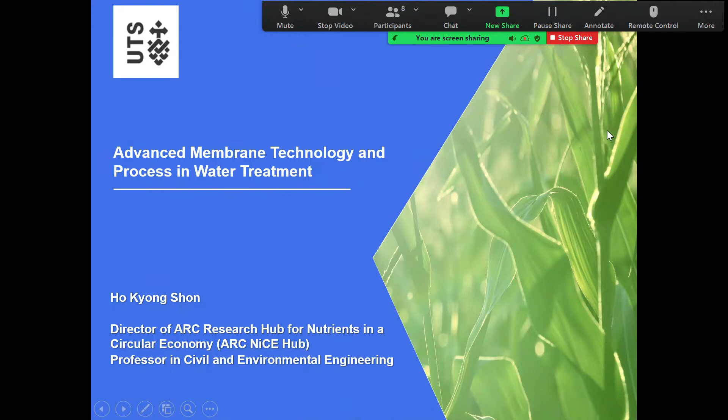Yes, thank you, Professor Song. You can. It's okay, right? Can you see Yes, the? okay. Yeah. Yeah. So this is the today content.

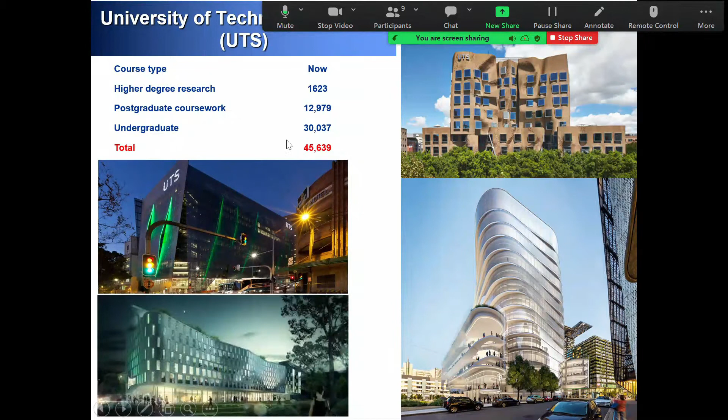This is the library, and this is the business building. We have almost 45,000 students working together.

Our main activity is how we can make sure our nutrient circular economy system works. Currently we live in a linear economy: the production, use, and discharge of nutrients.

For nitrogen fixation, we rely on the Haber-Bosch process, which accounts for 2% of global greenhouse emissions. For phosphorus, we rely on phosphorus mining, but this will run out in 100 years, so we need to look at alternatives.

Based on these nutrients, we produce food using nitrogen and phosphorus, then consume it and discharge the nutrients into waterways as contaminants. We need to remove as much as possible to reduce nitrogen and phosphorus. Also, in wastewater treatment plants we produce CO2 and N2O, which are the main greenhouse gases, so we need to reduce these emissions from wastewater treatment.

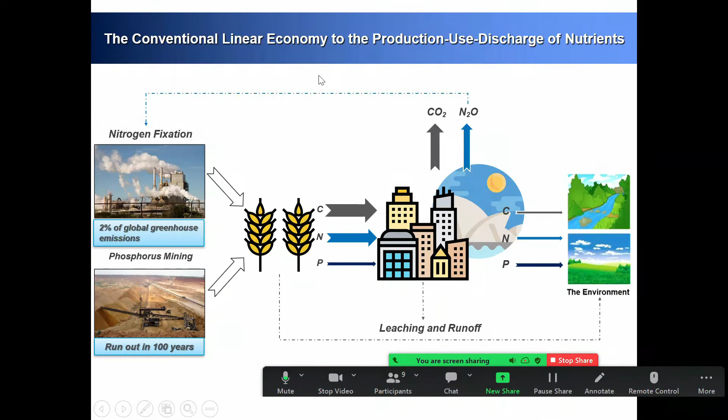So how can we turn a linear economy into a circular economy? We want to collect nutrients like nitrogen and phosphorus before they are discharged to waterways, and use them to produce fertilizer and food, which we can then consume. This is the nitrogen and phosphorus resource efficiency we can achieve using a circular economy system.

In Australia, which is one of the agricultural areas, we utilize a lot of nitrogen, phosphorus, and potassium, and 25% is exported to China, Korea, Japan, and other East Asian countries. We also rely on domestically produced food.

That's how we look at the nutrient balance. If we recover nutrients from humans, for example from urine, we can observe almost 10% of nutrients, allowing us to create a circular economy system.

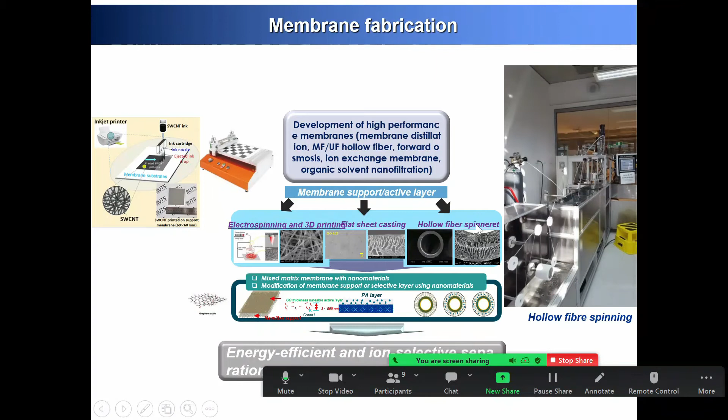We are also developing membranes in our laboratory: membrane distillation, microfiltration, ultrafiltration, osmosis, ion exchange membranes, and organic solvent nanofiltration. We utilize electrospinning, 3D printing, flat sheet, and hollow fiber methods to produce these membranes.

We are also looking at solar powered capacitive deionization. This is Tuvalu, shaped like a boomerang, with 25 square kilometers of area. Its population is only 10,000, and there is no fresh water, so they rely on rainwater 100%.

During severe drought, water availability becomes a major climate change issue. Climate change has increased sea levels, creating more problems, and even the groundwater collected from the rainwater system is getting worse due to climate change.

So we're looking at how we can provide solar powered CDI desalination at a small scale. That's what we are also developing.

Seawater contains lithium, which is one of the important battery elements. We have 230 billion tons of lithium in the ocean, so if we can collect it effectively from seawater, we can cover our next generation of battery materials. We're researching how to collect lithium and separate it from other elements.

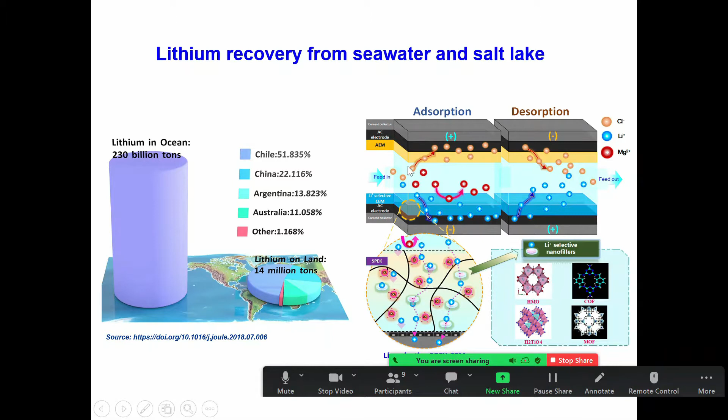Such as chloride or magnesium. You can see the lithium can be adsorbed on the CDI electrodes after passing through the cationic exchange membrane. Lithium compounds can selectively pass through this membrane, and we utilize new materials to enhance the selectivity of lithium from seawater while developing this technology. Our student is working in this area.

We are also developing a membrane for organic solvent nanofiltration, called OSN. Australia aims for a slice of the 61 billion dollar hemp industry for medical and food products. This is hemp, also called cannabis, which contains cannabidiol.

This is the non-psychoactive material, and it also contains tetrahydrocannabinol. Psychoactive extraction can be achieved using organic solvent nanofiltration. These are the CBD and THC compounds. When you have the cannabis plant, we can...

Put this solvent into the cannabis extracted material to dissolve the CBD and THC, which are important psychoactive materials. Then we utilize a solvent-tolerant membrane, using an inkjet printing method to make a better membrane for organic solvent nanofiltration. That's what we're working on in this area.

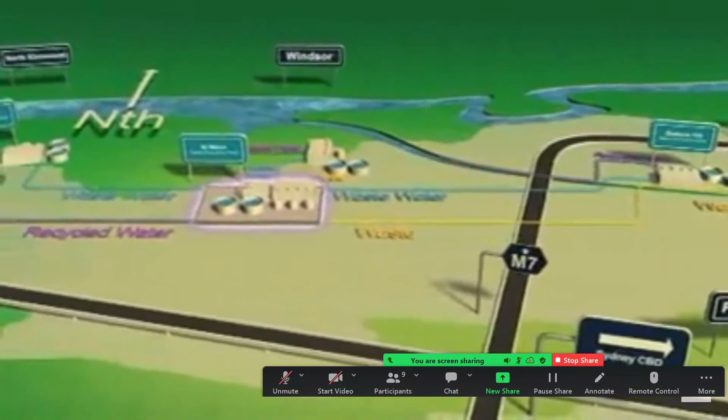produces up to 50 million litres a day of very high quality recycled water. The water is then pumped to Penrith and released into the Hawkesbury River below Penrith Weir. The St Mary's Water Recycling Plant is a key part of the New South Wales Government's Metropolitan Water Plan. It will play a critical role in increasing water recycling in the Sydney region to 70 billion litres a year by 2015.

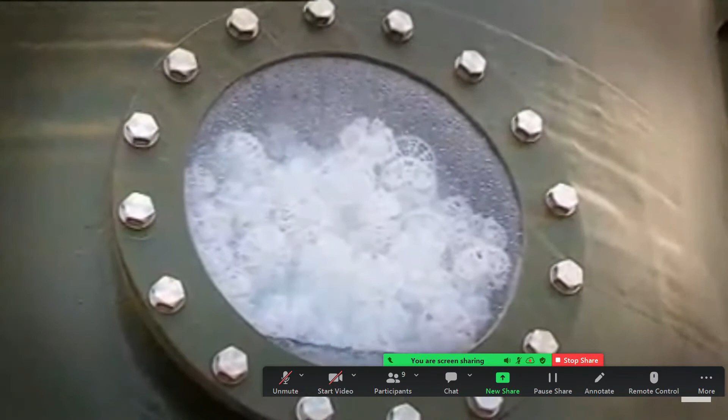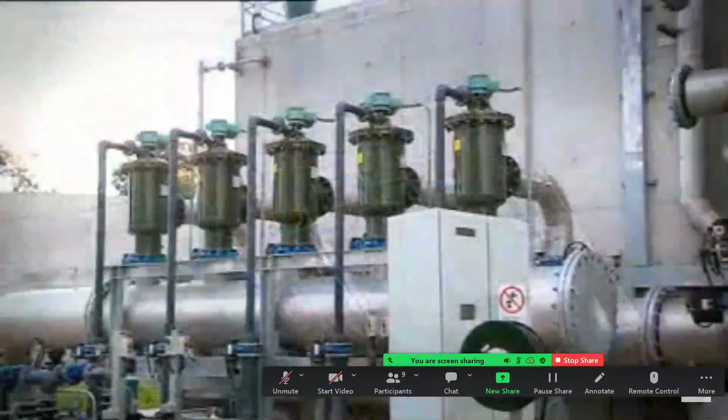At St Mary's Water Recycling Plant, the highly treated wastewater from the St Mary's, Quakers Hill and Penrith plants is delivered into the feed water balance tank. From here, the water is then moved through three filtration processes for further treatment. In the first part of the process, the wastewater passes through a very fine mechanical strainer. This pre-treatment process removes any particles of organic matter that may still be present.

Ultrafiltration is the next stage in the process. The recycled water is pumped into a tank containing the ultrafiltration membranes. A vacuum is applied to draw the recycled water through the semi-permeable membranes. The pores are only 0.02 micron in size, a micron being a millionth of a metre, and allow clean water to pass through, while suspended solids, bacteria and some viruses are blocked.

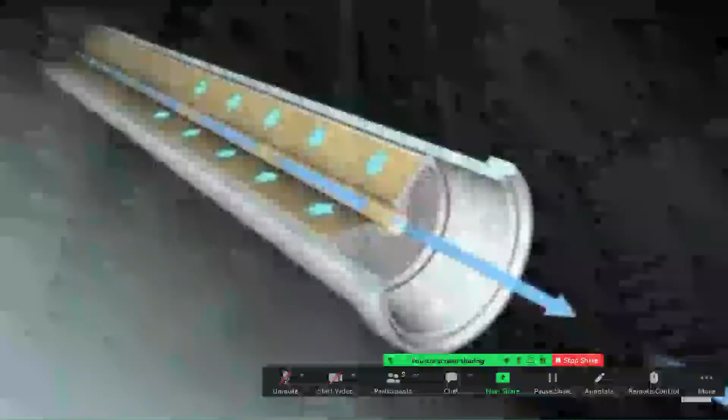From here, the treated water is then pumped to the reverse osmosis area for a higher level of filtration. The recycled water is forced at high pressure through thousands of smaller reverse osmosis membranes, which are like very fine sieves. At only 0.0005 micron, these membranes trap nutrients, chemicals, bacteria and viruses, allowing only pure water to go through. Within the plant, there are 7 reverse osmosis membrane modules in one pressure vessel, and a total of 528 vessels.

That's 3,696 membrane modules filtering the water. After the reverse osmosis, the water is then transferred to the decarbonators. Here it is mixed with air as it trickles down over the filter media called Tellerettes. This process assists in scrubbing out the carbon dioxide to deliver the final high-quality recycled water.

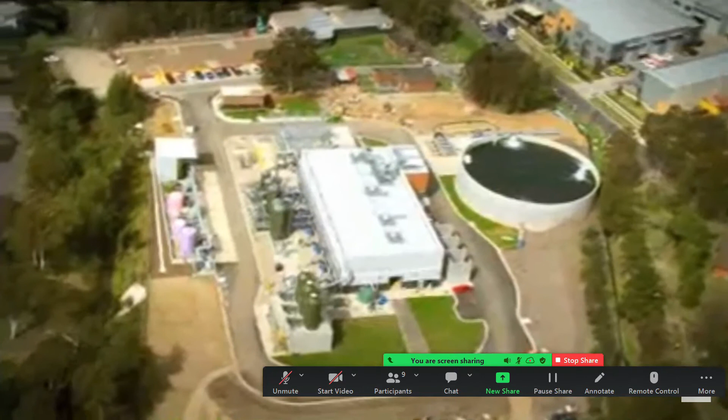The water is now temporarily stored in the recycled water balance tank prior to the pH level being corrected and final disinfection taking place. From here, it is pumped to Penrith and then released into Boundary Creek. The water, now highly treated to near drinking water levels, enters its final journey and is released into the Hawkesbury Nepean River. The St Mary's water recycling plant will produce up to 50 million litres of highly treated recycled water every day, helping to preserve water in Warragamba Dam while maintaining the flows of the Hawkesbury Nepean River. The project will benefit the wider community, as well as supporting the health of Sydney's greatest river system.

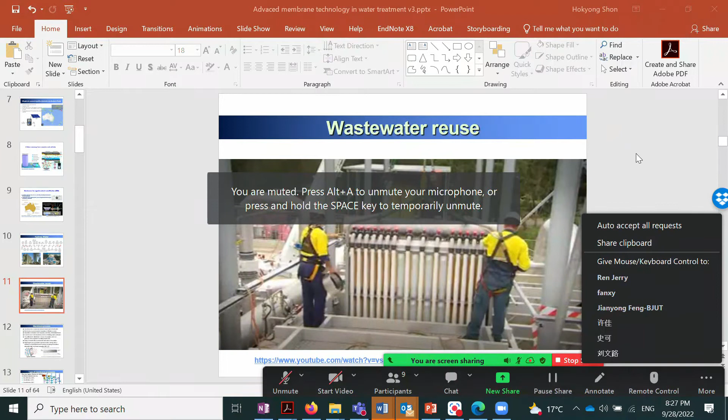So this is one of the wastewater treatment plants in Sydney. Let me just...

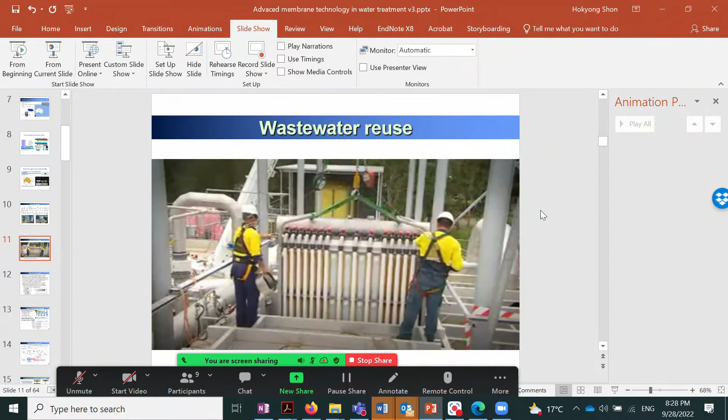So in Sydney we have a lot of wastewater reuse plants. For example, I already showed you from the previous slide. So this is the... the video is from YouTube.

Still you are looking at, sorry, can you see this one? Yes, we can see it. Yeah, that's great.

So this wastewater reuse plant is at a building level. Every day we produce 1,000 cubic metres per day, and this is what I showed in the video, the St Mary's wastewater reuse plant. It's one of the very largest wastewater recycling plants. Almost 50 million litres we produce of recycled water. We also have Sydney Olympic Park, which also produces a lot through a water recycling system.

But the difference is, in this video, you may notice we produce the clean water and then just discharge it to the river water system because of the clean river water system environment. So we don't fully recycle all the wastewater, we just discharge it to the Nepean River, and then it goes into our clean environment for the river system.

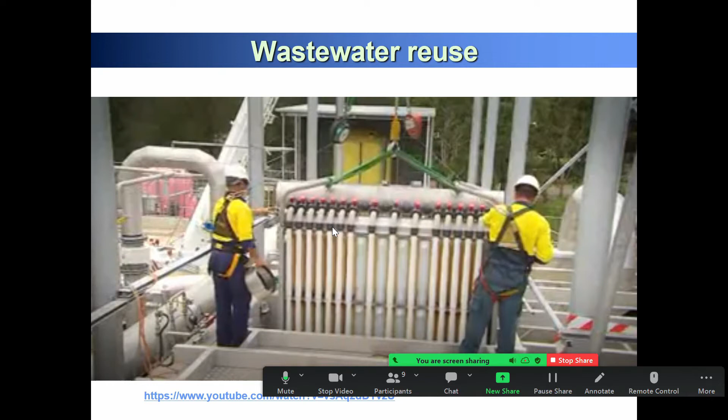So we continuously improve how to reuse more through the recycling system. Now let's talk about membrane. For seawater desalination and wastewater reuse, we mainly utilize the membrane process. Membrane is a very useful technology.

So what's a membrane? Membrane is the use of a porous or non-porous semi-permeable layer to treat water. This membrane process is a physical separation or filtration process. You have a large particle and a small particle, and the small particle will pass through while the large particle will stay. This kind of physical separation can be achieved, and the separation mechanism can be size exclusion and chemistry, which means there is a geometric and geological size difference between different molecules.

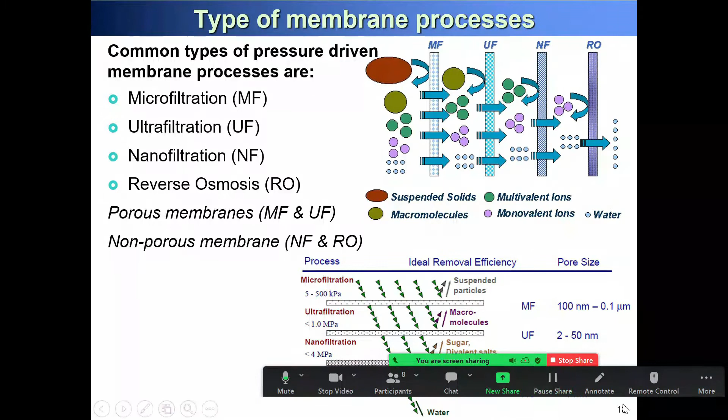So you can see what pore size level the different membrane types consist of. Also, you can see some of the range of micromolecular weight and relative size, depending on the dissolved ions and organics, and then viruses, bacteria, algae, sand, silt.

So we can see the different membrane technologies and how we utilize them for membrane applications.

If you look at microfiltration, it can be used as an alternative to clarification. In water treatment plants for drinking water, you need to remove clay or turbidity material. People utilize coagulation or flocculation and clarification sediment, then sand filtration and chlorination, and then you drink your water. But if you use microfiltration, you can replace the 3 technologies, coagulation, clarification, and sand filtration can be maintained from this microfiltration system alone. So you can easily control your process compared to this conventional process.

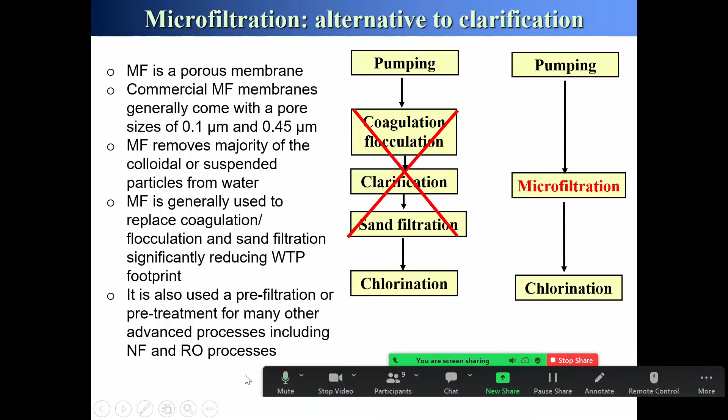It's also used as pre-filtration or pre-treatment for many other advanced processes, including nanofiltration and reverse osmosis. Since NF and RO are high pressure membranes, it's important that the membrane operate without major fouling problems, so microfiltration or ultrafiltration are generally used as pre-treatment to reduce the fouling potential of the feed water before RO or NF process. MF or UF is used for most RO desalination plants, creating more benefit to reverse osmosis. This is useful not only for drinking water or wastewater purposes, but also seawater desalination or wastewater reuse. So microfiltration and ultrafiltration can be used as pretreatment.

Ultrafiltration compared to microfiltration, what's the difference? If you look at the size, microfiltration is 100 nanometer to 0.1 micrometer, ultrafiltration is 2 to 50 nanometers. It mostly removes everything that microfiltration can remove, plus colloidal suspended material, and removes iron and manganese oxide in groundwater. When you have iron and manganese from groundwater at very high concentration, they are within this size range with some complexation, so we can remove them using ultrafiltration.

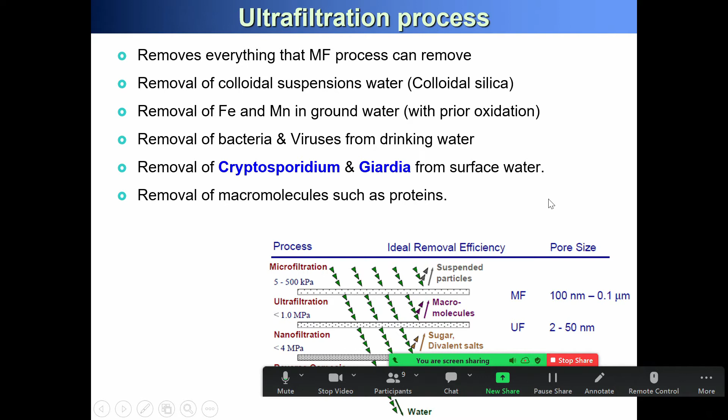Nanofiltration operates at the level of 2 to 5 nanometers, with transmembrane pressure around 5 to 20 bar. It removes 50 to 70% of monovalent ions, and above 95% of multivalent ions. So magnesium and calcium can be removed up to 95%, while you can remove sodium chloride only 50%. Nanofiltration is at the boundary layer between the size of monovalent ions and multivalent ions.

So some material, like when you have softening water or hard water with too high concentration of magnesium and calcium from groundwater, you want to remove only the multivalent ions like calcium and magnesium. You can utilize a nanofiltration system and maintain other minerals from groundwater, so it can be a very good water mineral source - that's the reason why nanofiltration can be used. It also achieves up to 70% permeate recovery rate and 100% removal of microorganisms, so nanofiltration is considered capable of replacing disinfection processes. It's sometimes used as a pretreatment to RO process to remove scale forming compounds such as calcium sulfate, and used for water softening to remove the magnesium and calcium that cause hardness. That's the main application of nanofiltration.

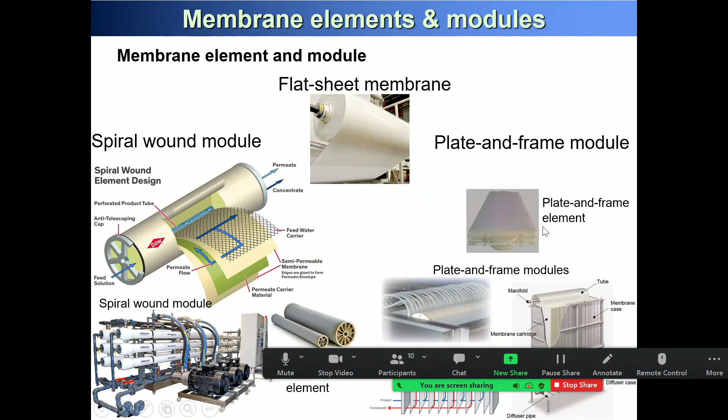Professor Tom, we have a break between two courses. I think we can have a quick break. Okay, you want to have a break? I think it'll be okay. What do you think? If possible, I want to finish maybe some more slides, maybe up to reverse osmosis, and then we can go to the next. So I can do one more slide if you agree. No problem, okay, so one more slide I can do.

And the reverse osmosis compared to nanofiltration: reverse osmosis can operate at high pressure, up to 70 bar for seawater desalination. Nanofiltration applies 20 bar, while seawater desalination utilizes reverse osmosis at 70 bar because of the high osmotic pressure of seawater.

The seawater salt concentration is almost 3.5%, or 35 grams per liter. This gives almost 25 bar of osmotic pressure, which you have to overcome to pass through the membrane. So for this reverse osmosis membrane, you need to apply almost 70 bar. That's the reason why seawater desalination reverse osmosis requires very high pressure and high energy.

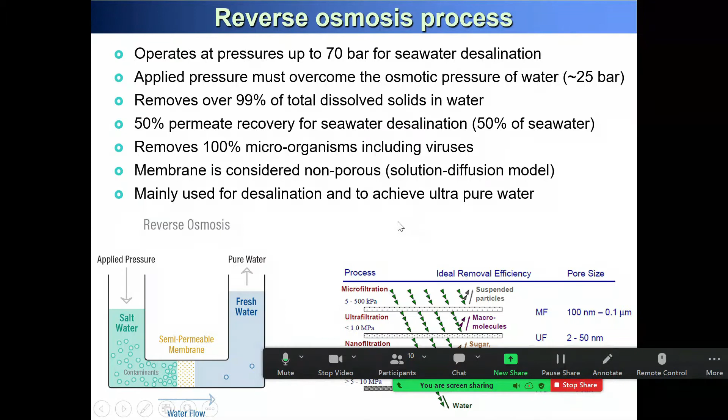So after break, how many minutes do we have, Jerry? I think just 5 minutes. You can just finish this part. Okay, we don't have to. All right, so after the 5 minute break we can go to membrane classification. We have around 40 slides, and we can go a little faster in the second session. Have a break now - yes. So now you can have a 5 minute break, and see you very soon. Okay, thank you Professor Sean. Thank you.

Professor Joe has something he wants to talk with you about. Thank you very much for your wonderful discussion for our class - I also learned a lot from your presentation. As we know, China is very large and we have a lot of technologies to treat water or wastewater, such as membranes. From your presentation, I know that in Sydney you use a lot of technologies such as membranes, shown in your PPT to introduce the membrane process. He's very interested in the membrane part you presented, especially the Sydney wastewater treatment plant - very interesting, the process using filtration and reverse osmosis to recycle wastewater and feed it back to the river. Thank you very much.

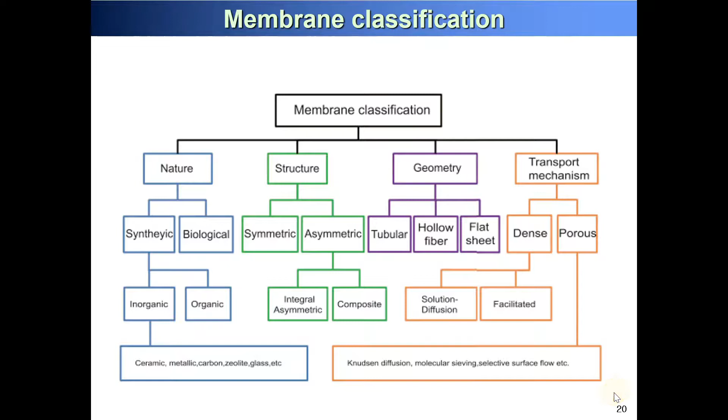Let me share my slide. So next slide is Jerry. Do I have to finish exactly by 10 p.m., or what's the time? Do I have to be very strict about the time, or a little bit relaxed? It could be a little bit relaxed. If you have other things to do, we can finish this part earlier, and I can do Q&A for students. Okay, so I can finish on time.

So we have membrane classification in terms of nature, structure, geometry, and transport mechanism. By nature, it's a synthetic or biological membrane. Your body, like your skin or your hair, are all biological membranes. We call this biological natural membrane, and they are sensitive. Synthetic membranes can be organic or inorganic, so we have ceramic, metal, carbon, zeolite, glass.

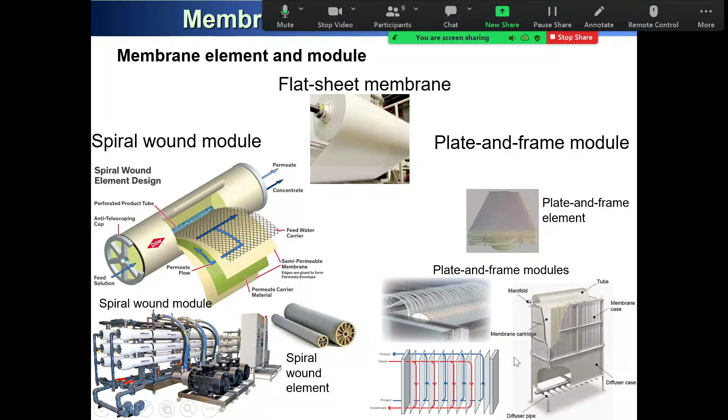It can be used for different purposes. For seawater desalination or wastewater treatment, RO membrane is spiral wound, and the hollow fiber or flat sheet module is for membrane bioreactor or microfiltration. The hollow fiber looks like your hair, with a pore size inside, used for microfiltration or ultrafiltration, with water flowing in and out, or into and out. So you can select from these options. It looks like a tubular type inside with a lot of fiber, and you put it as a cassette in your wastewater tank, utilizing it as a submerged hollow fiber membrane module. So this is the membrane design.

So flat sheet, hollow fiber, tubular, you can make some design. Then symmetry membrane has uniform pore size and thickness with resistance to mass transfer. Asymmetry membrane has a dense, highly selective top layer.

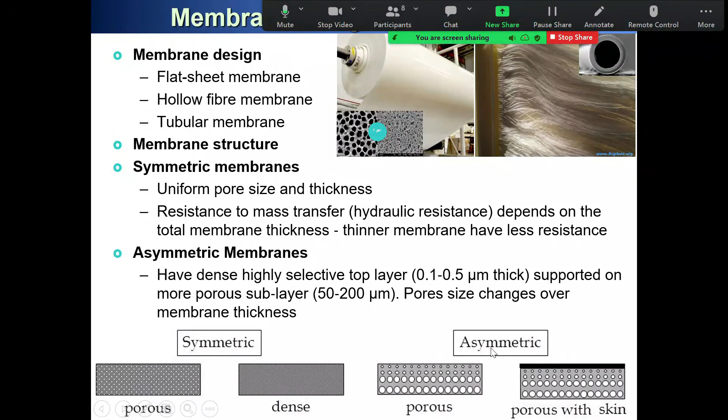As I mentioned, asymmetry membranes have an active layer. So the polyamide layer is on the surface, and at the bottom we have a support layer for the active layer. We can create different asymmetry or symmetry membranes for your membrane configuration.

Also you can see membrane images of different types of membrane, like hollow fiber. So you have a support layer, the water molecule will pass through this, and this is a different material for the flat sheet type. You can see some micrometer pore size on the PVDF membrane.

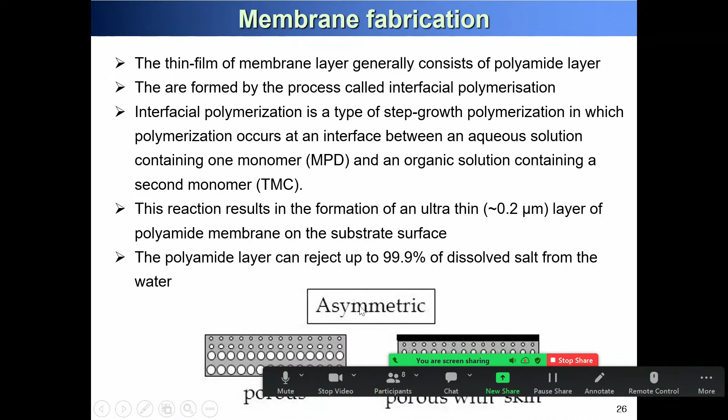...a larger pore wastewater RO membrane or a very high rejection seawater RO membrane. That's how we create the membrane.

Most membranes have a problem with fouling. Fouling is the accumulation of unwanted deposit on the membrane surface, and accumulated deposit can cause internal fouling. They will clog the pore size of the membrane, which we call surface fouling and pore blocking inside the pore.

So you will have less flux and low performance. Membrane fouling reduces membrane efficiency and productivity, and it is one of the major challenges of any membrane process. So you need to control this membrane fouling.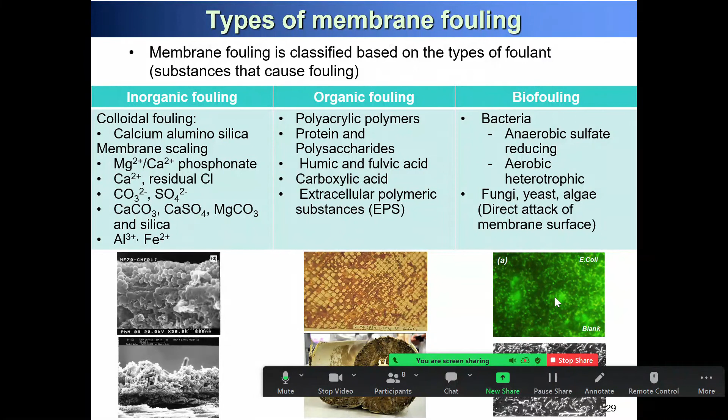Also biofouling, so some of the bacteria like sulfate or aerobic bacteria, fungus, yeast, algae, they have a direct attack on the membrane surface, so they grow on the membrane surface. It's like a biofilm will be generated on the membrane surface because there are a lot of nutrients to eat for this bacteria. So we need to remove this kind of fouling.

Physical, chemical, biological cleaning is very well established to restore membrane performance once fouling has occurred. Physical cleaning, so backwashing - you have a lot of foulant on the surface, and then you just push it through the backwashing. Water goes the reverse way, and then you will reduce a lot of fouling with physical backwashing with compressed air.

And chemical cleaning, so acid washing, basic washing, specific chemicals. Acid washing is very much useful for inorganic fouling, and basic washing is very much used for organic fouling. Specific chemicals such as for oil - so you have oil on the surface of the membrane, this oil can be removed very well with surfactant. So surfactant can be used as a chemical cleaning for specific chemicals, and bio or disinfection cleaning can be used for mitigation of the membrane fouling.

So depending on your feed water quality and your operation of the membrane, we have a very well established physical, chemical, biological cleaning method, so that you can utilize this kind of process.

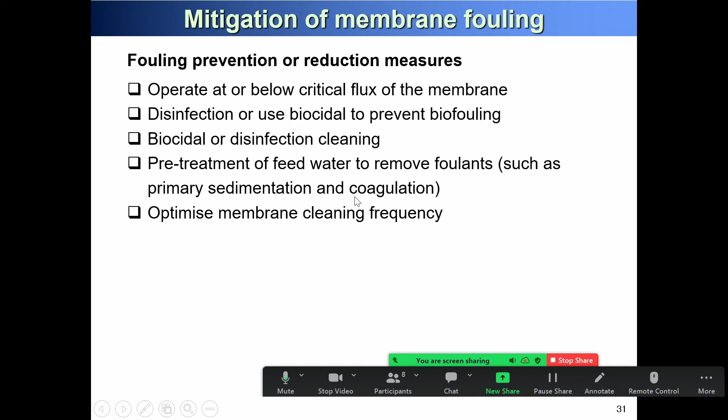Fouling prevention or reduction also can be achieved by operation below the critical flux of the membrane. Also disinfection or use of biocidal to prevent biofouling, and biocidal or disinfection cleaning, treatment of the feed water to remove foulant such as primary sedimentation and coagulation. Also optimize the membrane cleaning frequencies. That's how we can achieve control of membrane fouling for wastewater reuse.

Now I want to focus on advanced membrane technology and process in terms of seawater desalination. Let's see one of the videos, which is about the Sydney desalination plant. So you can see what process we are utilizing in Sydney.

Can you hear the voice for this video? Yes, yes, that's great.

So where is the desalination plant? Which part is it? It's next to the airport. Okay, I will show you. This is Sydney - so we have the airport here, right? Kingsford Smith Airport. And then the Sydney desalination plant is located here. Ah, I know, it's right - I didn't see it because when you land your flight from China to Sydney, you can see the desalination plant there.

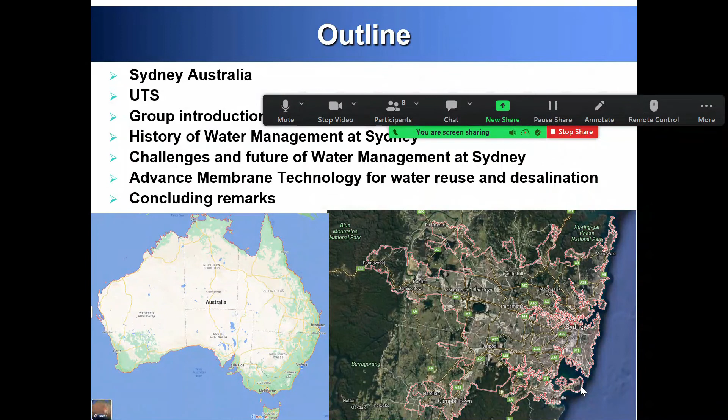An is an associate professor at the School of Energy and Environment, City University of Hong Kong, and leads the Water and Membrane Technology Laboratory. Dr. An received her PhD in Civil and Environmental Engineering at the Hong Kong University of Science.

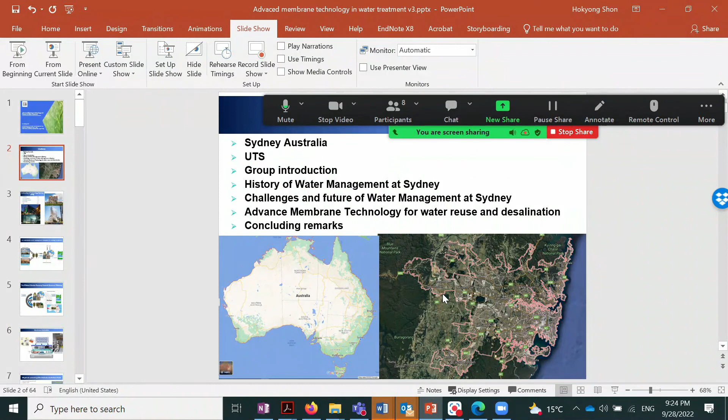So they collect the seawater from the Tasman Sea and then supply it to Sydney's main metropolitan cities. The Warragamba Dam is here, so they are all connected like a system. Depending on your dam level, the Sydney desalination plant and wastewater reuse plant operate accordingly - so we have a lot of interactive water resources for the city.

I just know it in Beijing, not in Sydney. Right, I think Beijing has no seawater, right? That's right, we don't have seawater here, so that's the difference from Sydney. But we also have a wastewater recycle system and plants. Okay, you have a lot of recycle plants, yes, but not seawater desalination. Not seawater desalination, but we have another project like a south-north water transfer to the north part. All right, I see, we have a very big project.

That's great, so that's how we are operating the different membrane technologies - most of them consist of membrane technology. I just want to continue. Any other questions, Jerry?

Okay, so we can continue with desalination. A lot of desalination is growing because of uncertain climate change, as well as population growth—people like to live near the coastal line and they need more water resources.

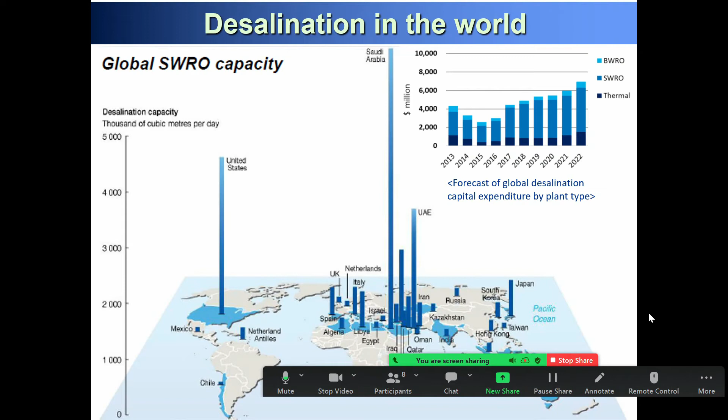It cost $2.1 billion, and after its first operation, it's currently shut down because of La Niña. We have a lot of rainfall at the moment, so it's completely shut down at this time.

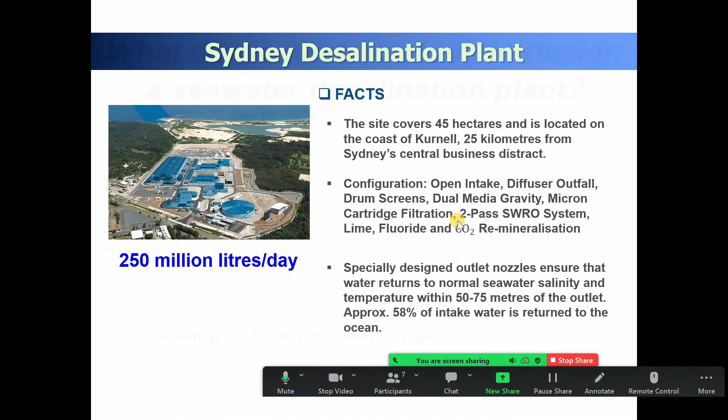So you want to understand membrane technology—what kind of membrane can we use? You can see the Sydney desalination plant's pre-treatment, membrane, and post-treatment stages. Membrane can be used in pre-treatment as a dual media filter, or as microfiltration, ultrafiltration, and reverse osmosis can also be used as membrane technology. You can see how this is possible to use.

You need to understand your seawater better. Seawater contains a very high pH compared to drinking water, around 7.9 to 9, because it has a lot of compounds dissolved in the salt. Based on this pH, mainly around pH 9, bicarbonate mainly consists in your water. CO2 is less than 8, and then bicarbonate and carbonate.

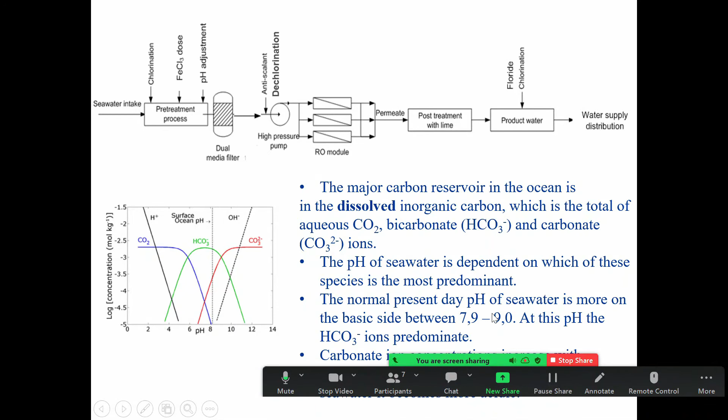When CO2 concentration increases in the air—nowadays CO2 is a major climate change problem—when you have more CO2 in the air, your seawater pH will decrease more and more, and this can harm seawater ecosystems, animals, or shells. That's another problem. Seawater has different characteristics of CO2, bicarbonate, and carbonate. Its pH is around 8, and because of climate change we have more problems with this seawater.

In pre-treatment of seawater, we adjust the different pH, because at this pH the hydroxyl compound can easily combine with calcium, magnesium, and iron, which causes a very high inorganic scaling system.

Pretreatment comparison: dual media filter. You can see how conventional methods like a dual media filter compare to ultrafiltration membrane. We can utilize either method, but ultrafiltration is more reliable and cleaner—your feed water can be produced to give a better quality reverse osmosis feed. So ultrafiltration can be used as pretreatment instead of the conventional dual media filter process.

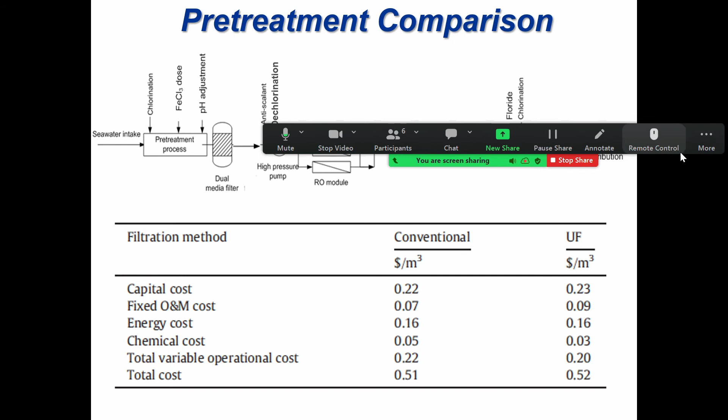Looking at capital cost and fixed cost, total cost is about $0.01 to $0.02 per cubic meter. The cost isn't that much different compared to the conventional process, so ultrafiltration is also very easy to apply for this process. This is also one of the problems related to anti-scalant and inorganic scaling.

Before the RO membrane, you extract your water molecule from the reverse osmosis membrane. You have a very high concentration of salt, so calcium in seawater will combine with carbonate, creating calcium carbonate on top of the RO membrane. You could also create magnesium carbonate, or calcium sulfate produced on the RO surface. The anti-scalant surface active material interferes with the precipitation of this kind of material, so we can think about what kind of inorganic scaling would be useful.

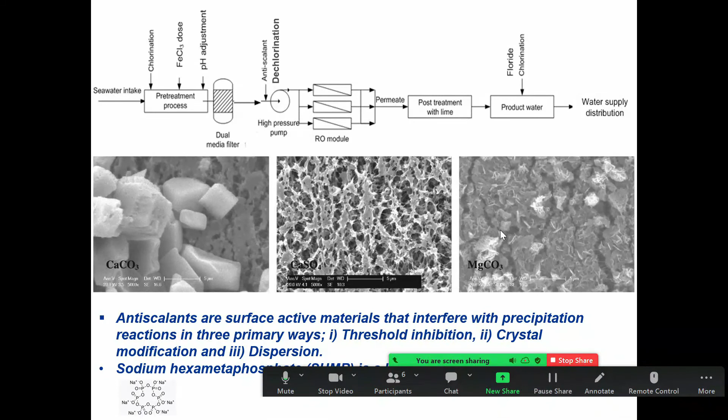Sodium hexametaphosphate, SHMP, is a hexamer composition of sodium phosphate. This is one of the anti-scalants you can incorporate, or some organics like EDTA can be used as an anti-scalant, depending on your inorganic scalant, so we can select any anti-scalant to have a better quality of inorganic scaling control. That's how we make sure to control inorganic scaling.

And dechlorination. We use chlorination because we want to prevent biofilm on the pipeline, even media filter or pretreatment. Before you discharge your chlorinated water, you need to dechlorinate, otherwise the polyamide polymer membrane on the RO membrane will be damaged. So we put SBS, sodium metabisulfite. This is used at a chlorine to SBS 3:1 ratio, and this creates a formula where you can remove the active chlorine dose, preventing damage to your RO membrane. That's how we can protect it.

Also, remineralization after the RO membrane. You need post-treatment with lime or similar, because we remove most of the salt in your RO system - sodium chloride, every salt will be removed, and a very pure permeate is generated. So post-treatment with lime has to be combined with the WHO recommendation of 10 milligrams per liter of magnesium and 30 milligrams per liter of calcium for drinking water. So we put calcium carbonate or calcium hydroxide. Lime is more about the calcium compound, and magnesium can be combined together.

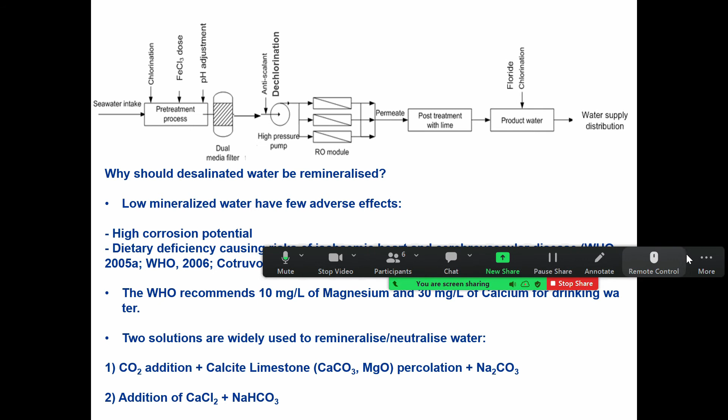Two solutions are widely used to remineralize the water. CO2 can be added to your water, which can be carbonated and changed to calcium carbonate, magnesium oxide, and then sodium carbonate, useful for remineralization of your water. So for seawater desalination, you need post-treatment which requires some minerals to be incorporated into your clean water system, before you discharge to your drinking water, tap water system.

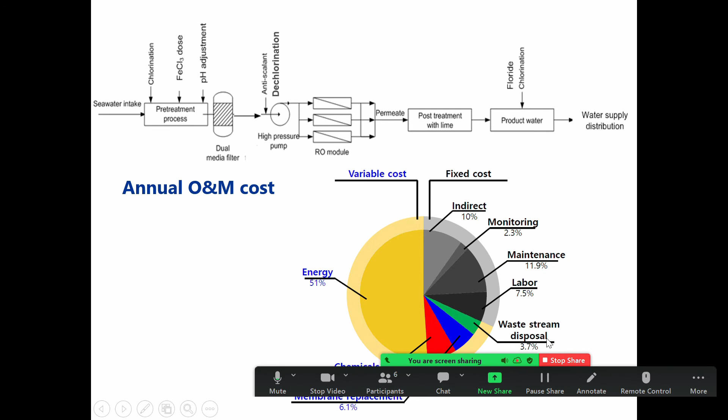So annual operation cost - this is mainly energy. When you operate a seawater desalination plant, because of the osmotic pressure, energy requires 51%. And then indirect cost: monitoring, maintenance, labor cost, and waste stream disposal required for O&M.

This is very important for water parameters for your seawater. You need to look carefully at the concentration of turbidity, organics, SDI, total suspended solids, iron, manganese, silica, chlorine, temperature, oil and grease, because these compounds will damage your membrane processes. Based on the seawater, mostly they are very clean, but some water has a very high concentration of different parameters, so you try to maintain this using pretreatment methods.

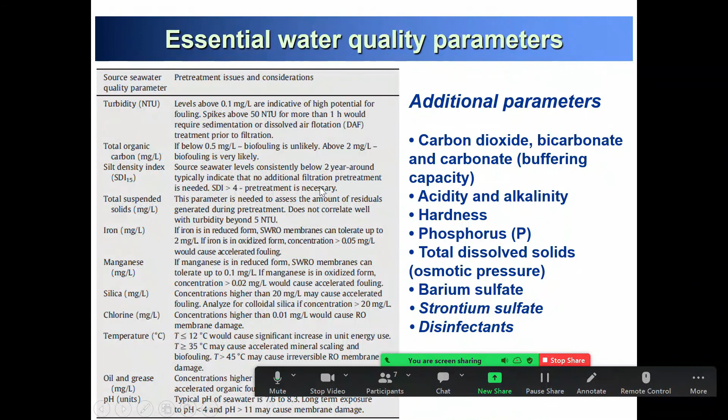One of them is the silt density index, but I don't think this is important for this class, so I will just skip this one. You can also see hardness, phosphorus, TDS, and then barium sulfate, strontium - these are also very important for designing your system.

Also, when you design your membrane, in fact you don't have to do manual calculation. We already have well established software, and it provides free software. Every membrane company like DuPont, Toray, or Origin Water, Beijing Origin Water, has developed some software to predict your membrane design. You have a lot of useful information - you put in the feed water quality, and get all the information about your water parameters, then put in the reverse osmosis, and you can design how many membranes you need and what kind of membrane rejection. All the compounds can be calculated from your simulated software system, so we have utilized this kind of software to design the reverse osmosis process.

So if we look at the RO membrane history, it has been developed for almost 70 years, since 1950. The first seawater desalination plant used reverse osmosis. Before that, people mostly utilized distillation.

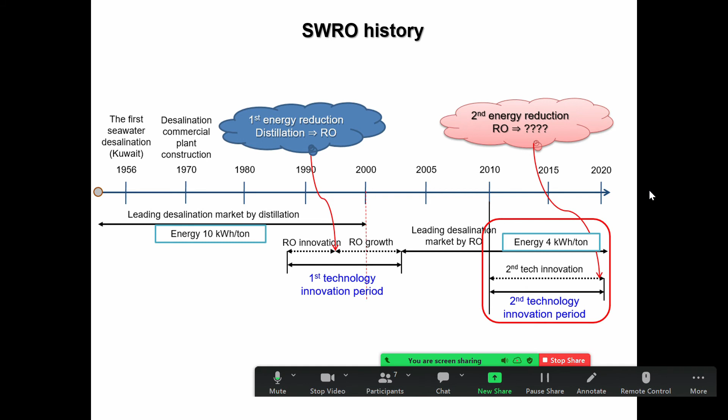That's the reason why SWRO, seawater reverse osmosis, has become dominant, and the distillation process has been reduced significantly from 2010. In the future, we need to look at another significant technology innovation to improve overall membrane technology processes, so that we can have more cost-effective and higher performance seawater reverse osmosis technology development.

If you look at the reverse osmosis membrane, we already discussed this. So this looks like an RO membrane. You can see almost the skin layer. This is the most important skin layer to remove overall salt, sodium and chloride. The skin layer is 20 nanometers, a very thin polyamide thin film composite, and this is what we call the polysulfone support.

This polysulfone ultrafiltration membrane has a supporting role, and then you have a backing layer. This backing layer is a nonwoven fiber, so that it can protect against high pressure, because it has to tolerate around 70 bar pressure from the pressure element. So you need a very small skin layer, support layer, and backing layer.

And then mainly they utilize osmosis diffusion. You already have the osmosis concept, so you have osmotic pressure depending on natural conditions. This is a cherry. Cherry contains very high sugar, and high sugar has osmotic pressure.

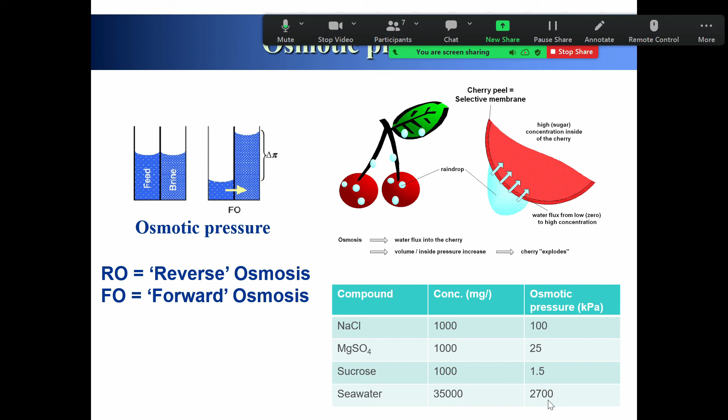For example, sucrose: when you have 1 gram per liter of sucrose sugar, it has around 1.5 kilopascal osmotic pressure. So when you have rain water, and you have a very high concentration of sugar in the cherry, the skin layer on the cherry will let water penetrate because of the osmotic pressure. Water penetrates into the cherry, it's swollen, and finally the cherry will burst, so that it gets damaged. That's how osmotic pressure works, and different sugar concentrations, seawater concentrations, every salt will contribute to osmotic pressure.

So that's the main problem, and this is the van't Hoff equation. Who developed this one? Pi equals concentration of salt times the ideal gas constant times temperature. This person got the first Nobel Prize in chemistry. So this simple equation, pi equals CRT, has a very high impact for calculating overall osmotic pressure. That's why he got the first Nobel Prize in chemistry.

And this is seawater desalination. We have seawater concentration and brine with 50% recovery, and this is the water permeate. We've achieved 50% recovery, and the overall energy consumption is almost 3.5 kilowatt hour per cubic meter.

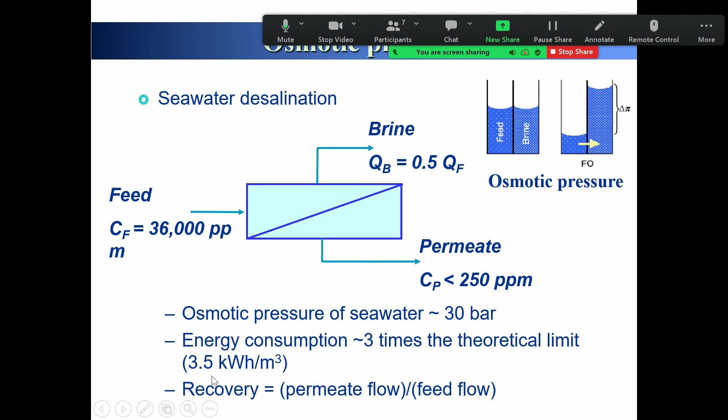Now we need to look at concentration polarization. So this is the membrane, and you have salt concentration - all these dots are salt concentration. You pressurize it, so water permeates, and the salt cannot pass through, so it keeps accumulating. So the osmotic pressure overall on the surface of the membrane, compared to pure water, you have a very high osmotic pressure compared to the bulk osmotic pressure condition.

Sorry, yeah, let me have a little bit of water.

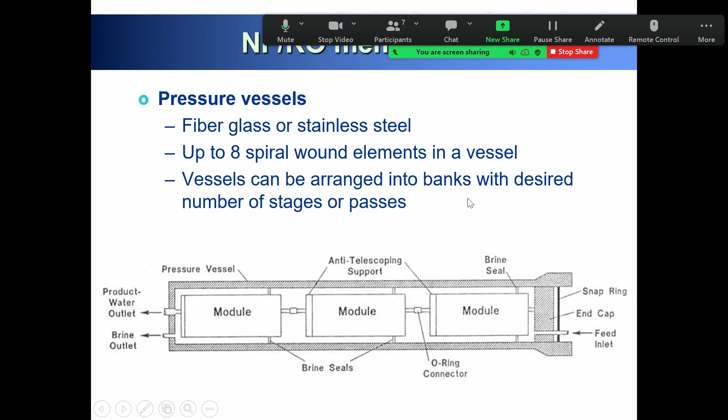This is a pressure vessel. You can see it consists of fiberglass or stainless steel, with up to 8 spiral wound elements in a vessel, and vessels can be arranged into banks with a desired number of stages or passes.

This is the overall seawater desalination energy consumption. Total energy use is 3.9 kilowatt hours for production of 1 cubic meter. You have an intake around 0.2 kilowatt hours, pretreatment like microfiltration, ultrafiltration, or dual media filter, then you have a reverse osmosis membrane, and you can have a discharge to the ocean, and then the product line.

So most of the water production energy consumption is highest in reverse osmosis, around 72%. This means if you can reduce the sum of your energy consumption in reverse osmosis, you can significantly reduce your energy cost. So let's look at the energy calculation.

This is very simple. You can do this based on your pilot demonstration or theoretical calculation. Let's look at the theoretical calculation first.

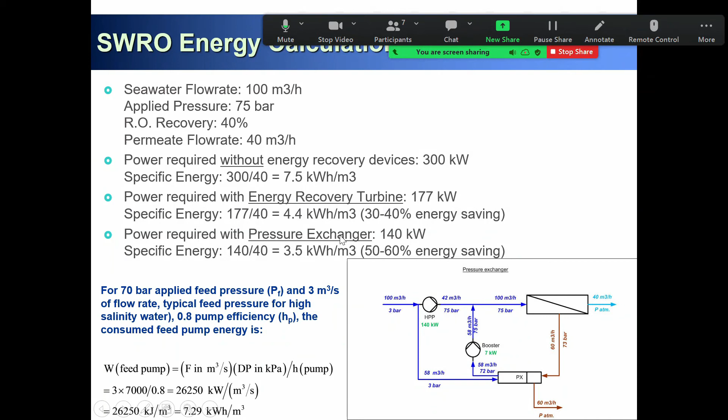When you use the power energy recovery turbine and pressure exchanger, you can save 50 to 60% energy. That's how you can reduce the power. Theoretical power was 7.3 kilowatt hours per cubic meter, and based on your real operation with the energy recovery device, you have saved your energy cost almost 50% or 60%.

Let's look at the energy, this is the power consumption. You have a light bulb, 100 watts normally, operating 10 hours during the night, so we just say 1 kilowatt hour. You have 10 times 100 watts, 1000 watts, which is 1 kilowatt, times 1 hour operation is 1 kilowatt hour. So in Australia, a small light bulb at 1 kilowatt hour costs around $0.3.

A desalination plant, as I mentioned, needs 4 kilowatt hours per cubic meter for reverse osmosis. Let's say the Sydney desalination plant produces 250,000 cubic meters per day. So every day we need energy costing $290,000 because the energy cost is very high. If you save 1 kilowatt hour from this, you can save almost 25% of your energy cost. If you reduce it by 2 kilowatt hours, 50% of your energy cost can be saved from this seawater desalination plant. That's why when you consider producing desalinated water at 4 kilowatt hours, you can guess how expensive the desalination process is.

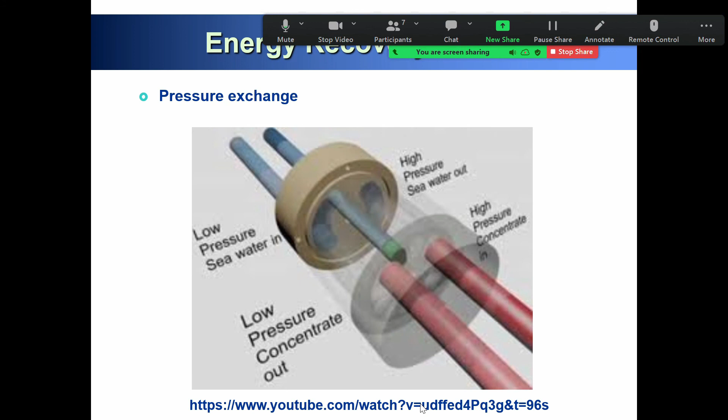That's the reason why most Australian desalination plants utilize renewable energy, such as wind farms. That's what we are trying to operate. Also, as I mentioned, the theoretical energy consumption was 7.3 kilowatt hours per cubic meter. However, when you operate your process with an energy recovery device, you can save almost 50%. That's the second innovation of the seawater desalination plant, because we utilize this kind of energy recovery device. I will show you how this energy recovery device works, and hopefully you can also think about how innovation can be achieved in your own technology.

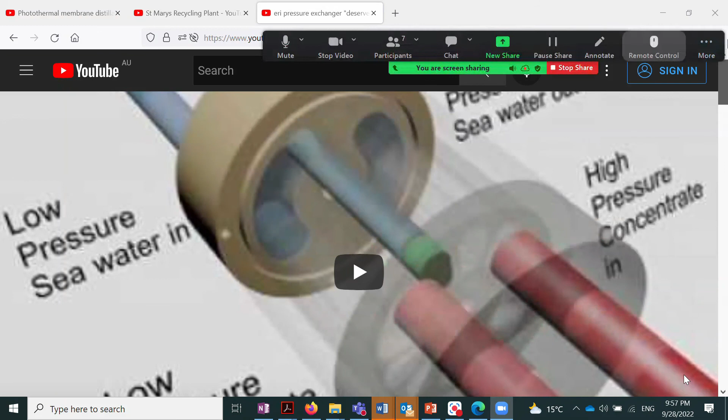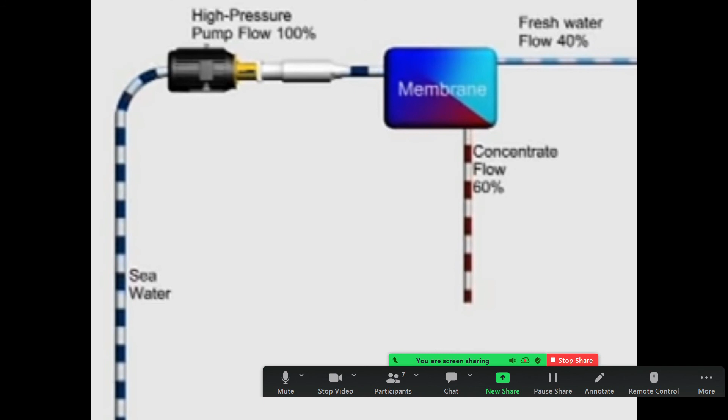60% saving by the PX. This is the reverse osmosis system, showing how the energy recovery device works to save 50% of your overall energy cost. When seawater reverse osmosis, or SWRO, was first introduced, the membranes required very high pressure, pumps were inefficient, and control systems consisted of throttle valves that wasted energy. However, by far the greatest loss was the pressure energy leaving the process in the concentrate reject from the membranes.

ERI's PX pressure exchanger recovers nearly all of the energy from the membrane reject stream and feeds it back to the SWRO process. Using just the energy in the reject concentrate, the PX pressurizes new seawater for the membranes, reducing the high-pressure pump flow requirements. This not only saves energy, it reduces the size and cost of the high-pressure pump.

The reject concentrate from the SWRO membranes flows to the PX, where pressure energy is transferred directly to incoming seawater at up to 98% efficiency. Pressurized seawater from the PX, circulated with a small booster pump, joins the stream from the high-pressure pump. The energy consumed by the high-pressure pump, which is by far the largest operating expense of an SWRO plant, is reduced by about 60% by the PX.

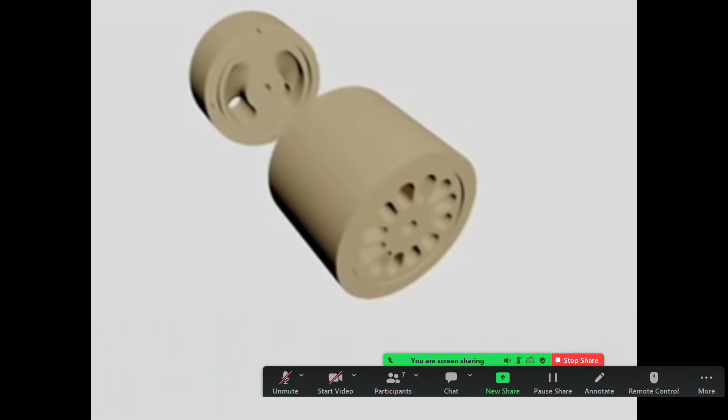The PX is simple yet elegantly designed. The housing contains a ceramic rotor, the only moving part in the device. Surrounding the rotor are a sleeve and two end covers. These ceramic components fit snugly around the rotor, forming a tight seal that prevents pressure from escaping.

Low-pressure seawater enters the PX and fills the rotor. This seawater is then exposed to high-pressure concentrate from the membranes. Pressure transfers directly from the concentrate to the seawater inside the rotor ducts. Spent concentrate leaves the rotor at low pressure, pushed out by fresh seawater.

The rotor is turned by the flow itself, spinning at approximately 1,200 rotations per minute. The ducts of the rotor function like a carousel, charging and discharging as the pressure transfer process repeats itself. Water in the narrow gap around the rotor, which serves as a lubricant, is continuously replaced and refreshed. Mixing between the concentrate and seawater is minimal because the exposure time is so short.

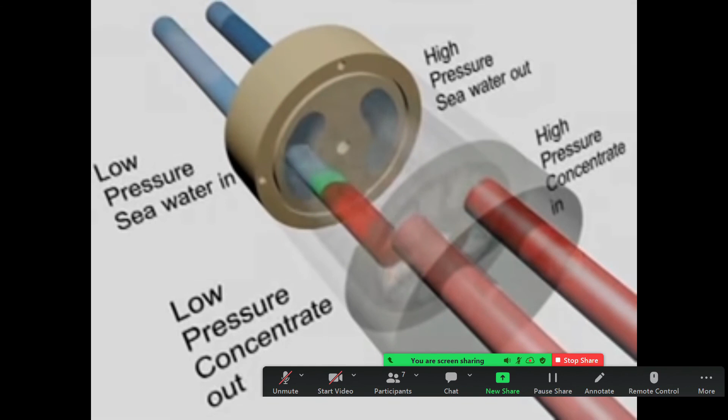Overall, the PX Advanced Energy Recovery technology is the most efficient, easy-to-use, reliable solution to affordable desalination today.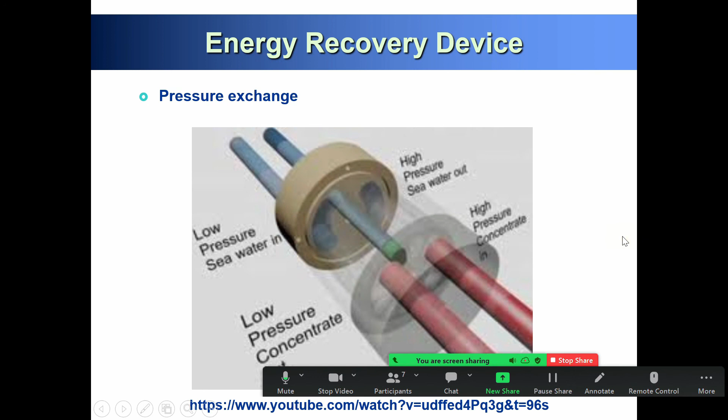So that's how the energy recovery device works, because this device really saved the overall energy cost of seawater desalination. That's the reason why most plants in the Middle East and other countries utilize the seawater reverse osmosis process rather than distillation. So that's the second breakthrough. For seawater desalination, the first breakthrough was the reverse osmosis membrane using polyamide thin film composite membrane, and the second breakthrough is this energy recovery device. Because of these two technologies, seawater desalination is very popular nowadays.